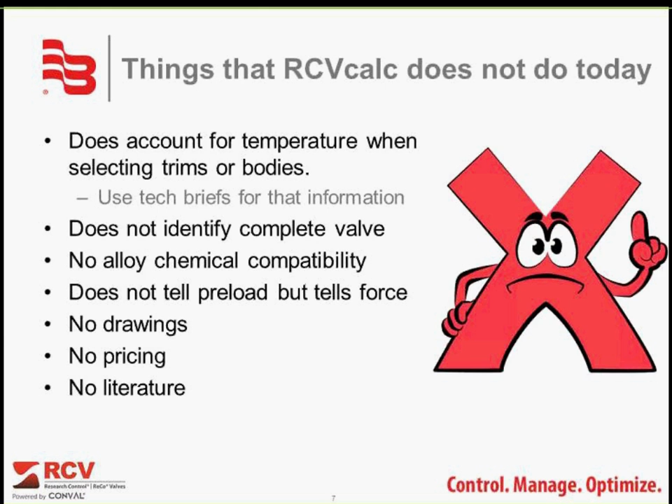The goal for RCVcalc when we created this was to give our customers a fine-tuned software program for low flow opportunities. This is that. It's a great product for that. It's available to all end users. So we've invested the proper resources to make sure that anyone who wants this program can get it at no additional charge. It's a very easy way to do business with us.

There are additions that will be coming in the near future, but this is our current offering, so please stay tuned. One of the neat things about this is that we will have upgrades for the software as well as the database to keep you automatically up to date for future opportunities. This product does gas, liquid, steam, and supercritical media. It has a fantastic database and graphical interfaces. There's a lot of things to really like about this.

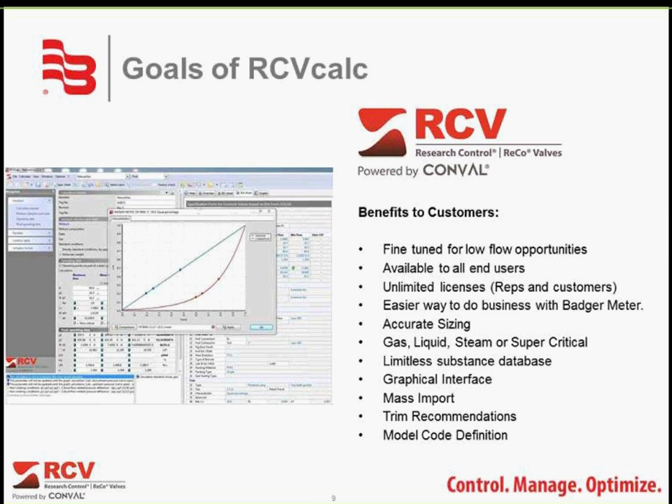One of the main features that we're proud of is that we have a mass import tool. So when you have an application that has a multitude of valves associated with it, we will give you an Excel sheet that you can upload that information to, and then we can download that back into RCVcalc. This will allow us to make short work of a very long project. And when there are changes on this project, you can alter the spreadsheet and get submittal data almost immediately. That's something that we're only going to do in-house right now. To get this, please contact customer service.

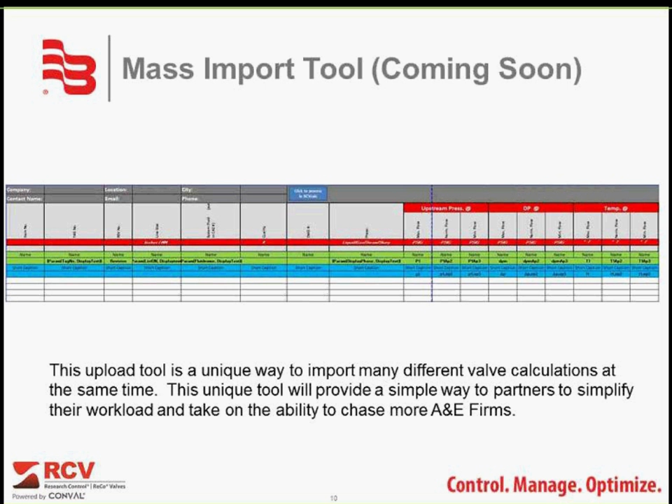Next thing I wanted to identify is that this tool also leverages NIST database identification. So what this does through the National Institute of Standards and Technology is that if you already have the NIST database on your PC, RCVcalc identifies that and uploads that within the database section of the software.

The benefit of this is that it actually goes through and leverages the fluid properties and mixtures based on the thermodynamic equations of those different properties. It gives you more accurate process calculations for high pressures and for low temperature applications.

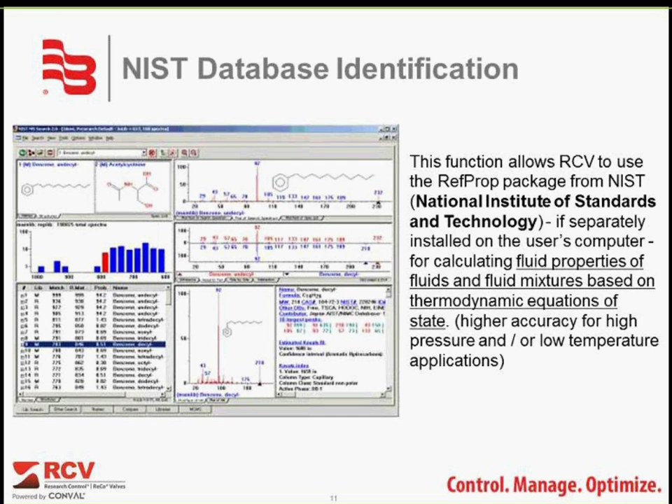What you're looking at here is the interface for RCVcalc. What we want to touch base on first is there's 4 main tabs that we use when navigating through ConVal or RCVcalc. The first tab is the medium tab. This is where we select our media and we put in the various application parameters. The second tab is the pipeline tab. This is where you can put in some specific information if your pipeline size deviates from the valve size.

The third tab is the control valve tab. This is where we get some information and can select the control valve, play around with swapping out some trim sets, and get some additional information. And then the final tab, which is called Actuator Forces, is where the calculations take place for the closing force on the actuator.

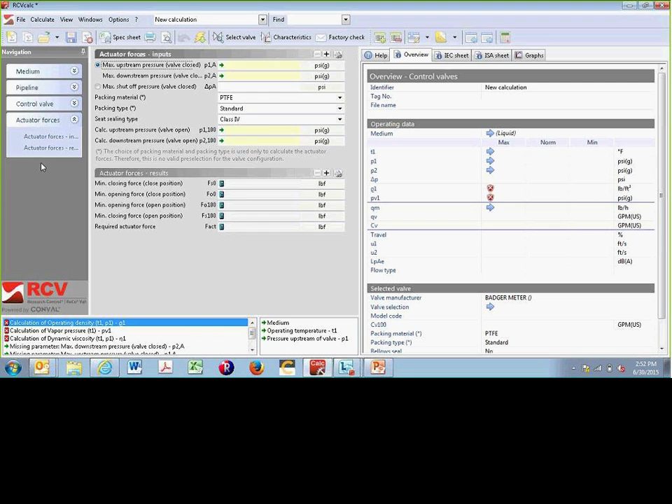Moving back to the medium tab, we're going to walk through starting up a new application for a potential customer. First thing you want to do is put in an identifier into the top field. Typically, your customer will provide you with a tag number to uniquely identify the valve. And then if you're doing multiple revisions, you can keep track of this with a rev number.

The next thing we need to do is select the media that the customer has specified is going to be in their application. We're going to keep it simple today, and we're going to choose water. Now, there's 2 ways to get to the media you're looking for. The first is if we begin to type, you can see that as I type WA, it searches the database and finishes the text for media that's in there. If I hit enter here, it'll choose water.

Now, the alternate way to get there is if we click on the 3 dots here to open the media selection menu. The first thing you're going to see is the favorites tab, and what you can see in here is some of the medias that I've used recently, and as you use the program, your favorites list will build up too. So some common stuff that you'll find on your front page is usually air and water and similar things. If we click onto the second tab, we get to the substances tab.

Because I was already on water, it's pre-selected here, but on the bottom box you can see we have a search text, and if I start to type water again, it filters as you go. You can see that it's got water listed, and then it gives you steam also.

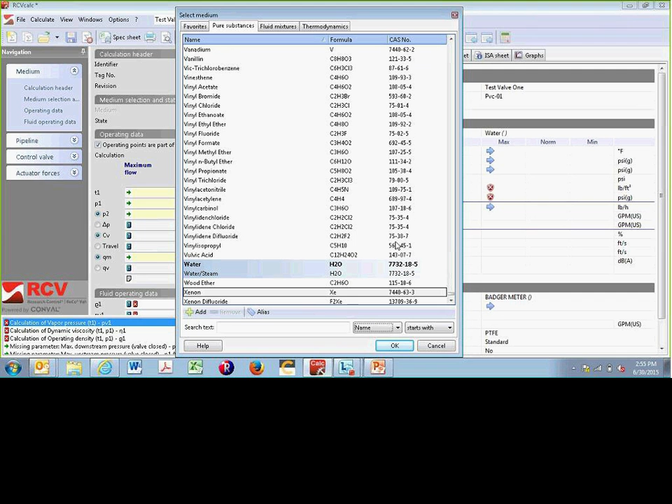Again, we'll go back through. I'll type in water. You can see it filters for water. We double click on this and it brings water into the medium section. You can see here in this line, this is going to identify the state. This is the ability of the software to determine whether it's solid, liquid, gas, or supercritical.

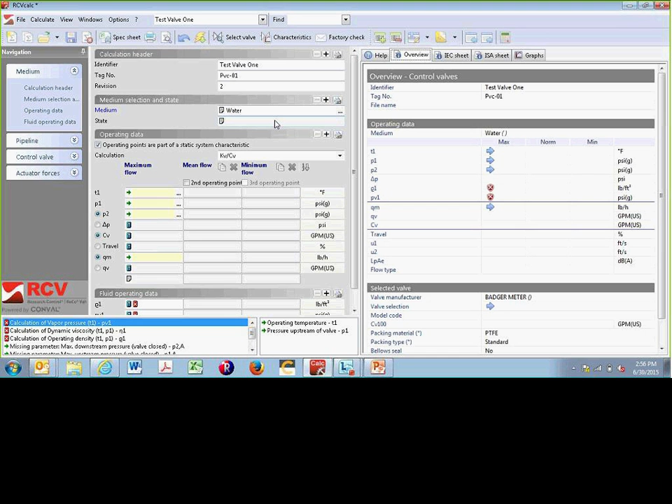Certainly we're not flowing solids, but if you put water in here below 32 degrees Fahrenheit, it will tell you that it's solid and prevent you from proceeding with the application. In order to do that, it needs to know temperature and pressure. What we have here is the operating data portion. This is where we have the data entry for the parameters typically supplied by your customer.

The important thing to note as we scroll down, some of these are a little cryptic. There is a mouse over function where if we hover over here, we can see that this first line that's shown as T1 is operating temperature. If we move down, P1 is pressure upstream of the valve, and so on down the line.

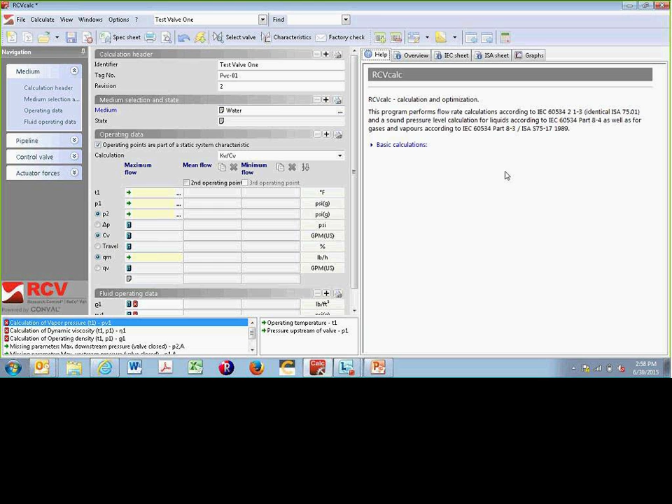Also over here on the right-hand side is a very beneficial help menu. Any of these boxes that you click on, you can see the help will tell you what the box is indicating. Any of these boxes that involve calculations, you can see the help file brings out the equation.

The equations involved. You can actually click on this ISA data sheet, which is a familiar output format, and you can see that as we type over here in the boxes, it'll begin to fill in the information over there, and we can bounce back and forth between the two.

So let's walk through. We'll do a hypothetical again. We're using water. We'll do 75 degrees, nothing outrageous there. 50 psi upstream, 25 psi downstream. What's important to note now is you can see that the state of the media has filled in, which means the software is telling us that at 75 degrees and 50 psi, we do have liquid water. Shouldn't be a surprise to anybody.

You can also see the information did begin to fill in over here. And anytime you see a piece of information over here and you want to figure out where it's coming from, if you click here, you can see that by clicking on the inlet temperature of 75 degrees, it brings the cursor function back over to that box.

Another important feature for the program is the ability to have drop-down menus here for the units of the application. So in here, a couple temperature variables, not a lot to see there, but under pressure, there's just a huge amount of possibilities, and that reflects the various amount of information you can get from your customer and the various units that they can use when supplying the information.

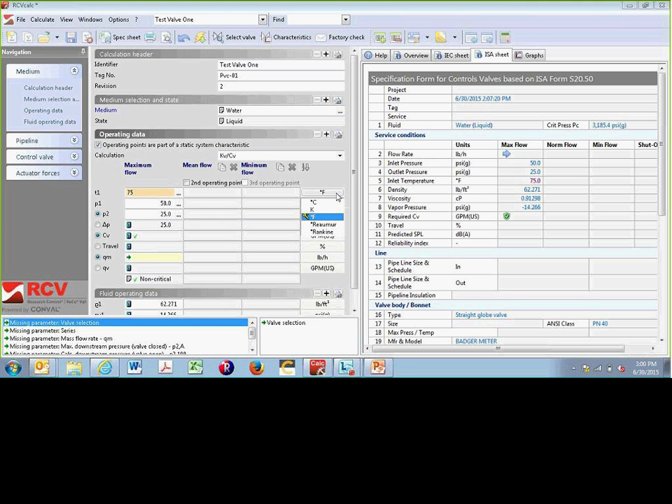It is important to note that if you change the parameter in the units box while you have a numerical value in this box, it will calculate the change for you. So we can see that if I change it to Celsius, it did change the temperature to Celsius. As you can see, it changed the units from Fahrenheit to Celsius. I'll just go through and change them back.

If you want to change the units on a global scale, if we come up to this arrow, we can do SI units or US units. If we click this, you can see it immediately went to the more familiar European units of Celsius, bar, and cubic meters per hour. And we can bring that right back to the US units typically used here of Fahrenheit, PSI, and GPM.

If we look over here, going down the left-hand side, we have the option of entering P1 and P2, or we can enter in the delta P. Saves you from doing a little bit of math if your customer supplies pressure drop versus P2. And you can see that if I put in the pressure drop of 40, it'll automatically come back and calculate the P2 of 10. We'll go back and change that to the original value, and you can see that when I put in 25, it calculates the other 25 for you.

We'll go through and we'll put in a flow rate. It's important to note that you have 2 lines here. QM, that's your flow rate by mass, and you can see over here that it has units of weight. And if we're on the QV, those are units of volume, and in this case it defaults to GPM. It will use the density of the media to calculate one from the other, but it's important to know that if you're looking for volumetric units, you need to click down to the volumetric area.

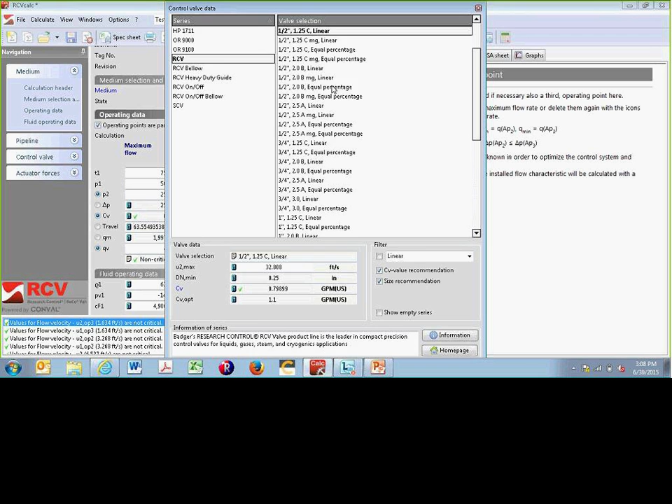We can see that this box is the travel percent of this trim at 4 GPM for these parameters. It's important to note that if you bring a trim in, you can see that we're at 63%, 31%, and 15%. If you want to try a different trim, there's 2 things you can do. You can click Select Valve again. We could bring in a B equal percentage trim to see what that looks like. We can see that we're at 80%, 65%, and 49%.

If you want to compare 2 trims on the same chart, we click on this characteristic button, and what it brings in by default is the trim you had initially selected. So this is the B equal percentage, and we can click this comparison button, and let's just see what an A equal percentage looks like. We'll double click that. Now you can see the blue points represent the A equal percentage. It's a larger CV. It brings the points down the flow curve as we would expect.

We can even try a larger trim. Not in the 1/2 inch valve, that maxes out at the A trim, but if the customer wanted to do a 1 inch valve, we could see what the 3.0 equal percentage would look like. Again, it brings the points farther down the curve. If you choose to convert the software over to the comparison trim, you can click Apply, and we can exit, and now you can see that we've moved over to that comparative trim.

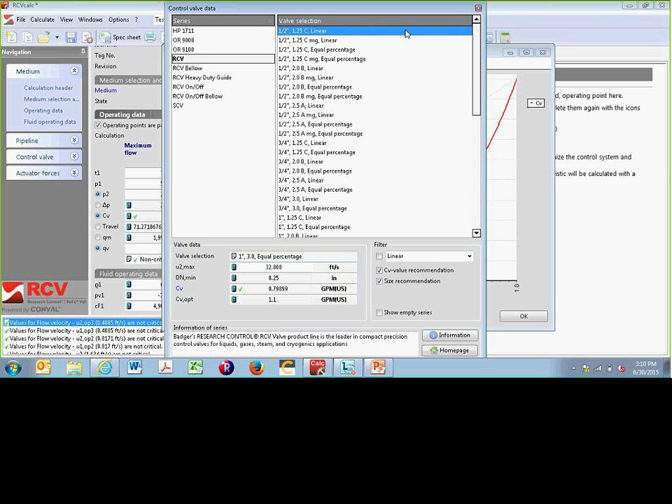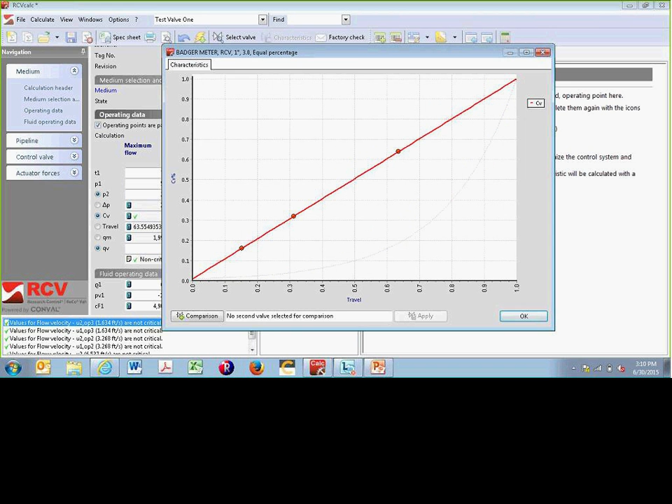Let's go back to our original C linear, because we can compare the linear versus equal percentage. We'll take a look at that. So you can play around with the values, bring trims in and out, get a feel for which ones get you equidistant from the top and bottom and is a good fit for your customer. So we basically fully define an application here. We've selected a valve, half-inch with C-trim. We're between 63 and 15% open. That's acceptable. We'll move over to the Pipeline tab.

Over on the Pipeline tab, the important thing to notice is that if your line size equals your pipeline size, which this box comes in checked by default, you really don't need to do anything here. The equations here are usually used for flow velocities. As your pipe diameter increases, your flow velocity out of the valve will decrease. If you deselect this, it allows you to edit these fields.

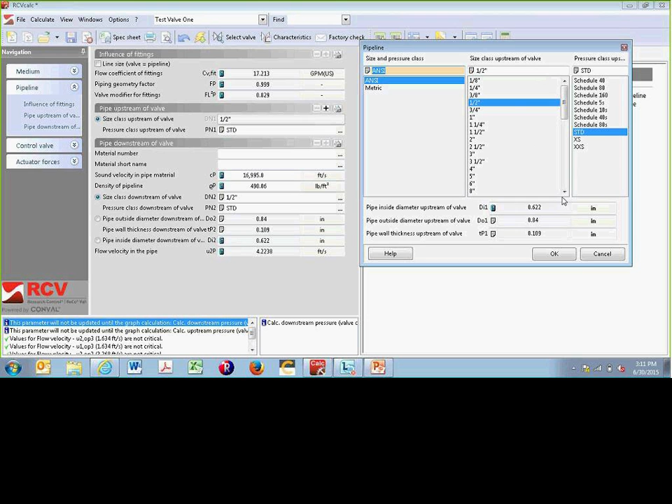So if your pipe upstream of the valve is something other than half-inch, just like on the valve selection area, you can click on here. You can modify your variables. But again, that's not too important unless your line size is different than your pipe size, or you're using some very heavy-walled pipe or something that deviates from what you would see as a standard.

If we move to the Control Valve tab, we can go through here. It tells us, based on what we selected, we're in the RCV family. There's that half-inch 1.25 C linear trim that we picked. And it does start the traditional RCV model code for you, 1802 for half-inch, and it does bring in that C linear trim. Because in the program here, we're not selecting a body type, we're not selecting materials, we're not selecting trim materials, and those would be what these other X's are for. We can't make those decisions to fill out the model code at this time.

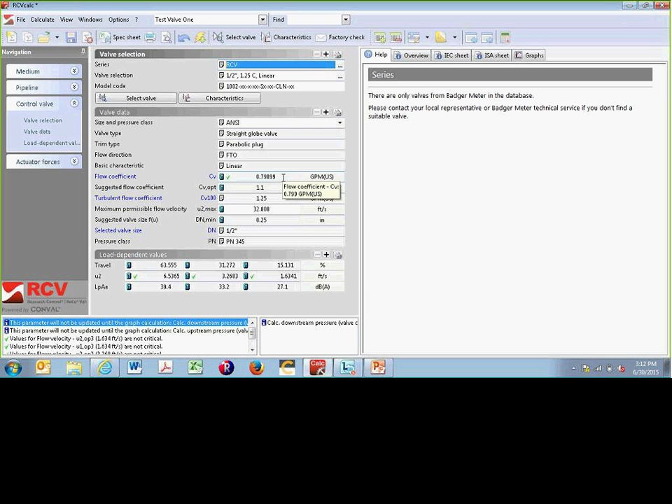We can walk down. It's a straight globe valve that was selected, parabolic plug, flow to open. These things are all standard for the Badger valve family. The basic characteristic is linear. We selected that when we grabbed the trim. This is the calculated flow coefficient. The CV100 is our selected CV. Again, that goes back to the C trim that we picked. And it does give you a suggested flow coefficient of 1.1, and we actually picked the next largest trim up from there.

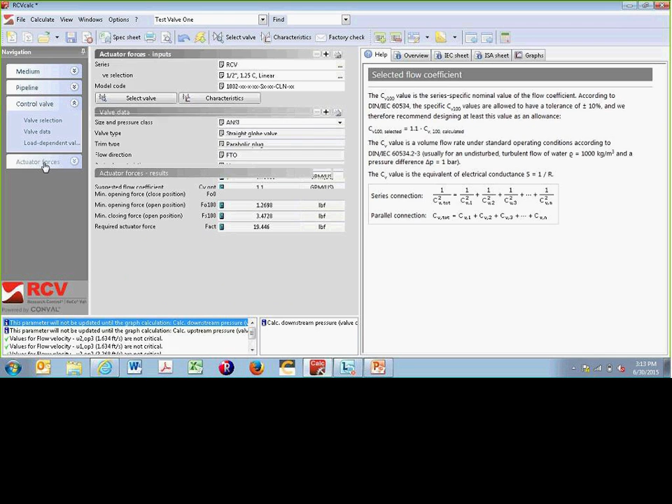Down at the bottom again, there's a summary of the travel for the valve. Again, if you mouse over on the left-hand side, it gives you more info. This is the flow velocity exiting the valve, and this is the predicted sound level in decibels. If we bounce over to the Actuator Forces tab, it did carry over the maximum upstream pressure from the medium tab of 50 psi. It actually brought in the second downstream pressure.

And what it's walking through down here is some various force calculations. What's important is the bottom one, required actuator force. This is not preload. Brian touched on that during the PowerPoint. This is actual linear pound force. And what you need to do is divide that by the surface area of the diaphragm to get the PSI. So with our half-inch valve with 11.3 square-inch diaphragm, you're looking at just under 2 pounds of preload, which is certainly important to note for shut-off purposes for your customer.

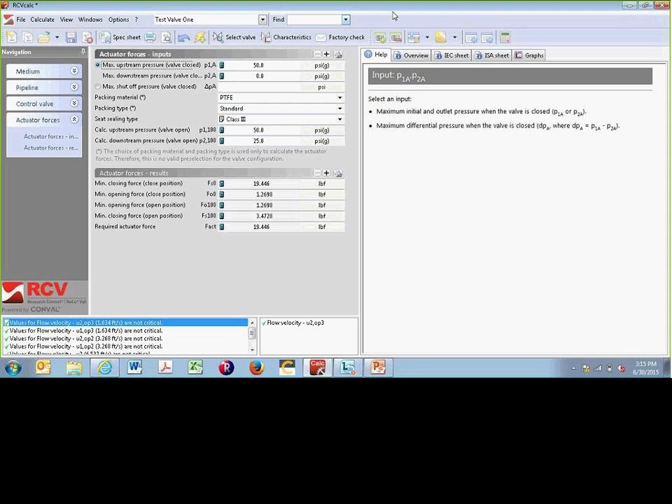Now that we've basically configured a whole valve, ran through a whole application, selected a trim, let's see what we can do for outputs. We talked about this briefly before. Over here on the right-hand side, there's this overview document.

There's the IEC, which is the European format document. Then we have the ISA data sheet. Again, if you need to see where any of this information is coming from, if we touch on this density here, you can see that that density information is coming from that box. If we touch on vapor pressure, you can see that that information is coming from that box.

It's also important to note each one of these menus has a plus sign. That plus sign is an expansion button for the information that's contained here. What you see by default is the more common, readily used information. Behind the scenes, if we click on this, you can see there is more information. Certainly down here at the fluid operating

data, if we click on that, you can see that there is information on calculated viscosity, vapor pressure, vapor temperature, sound velocity, which again has to do with noise levels. It actually calculates input, the density of the media into the valve and density out of the valve. That's a more important factor for gas phase media. You can see it does change slightly here, but for liquids that's usually inconsequential.

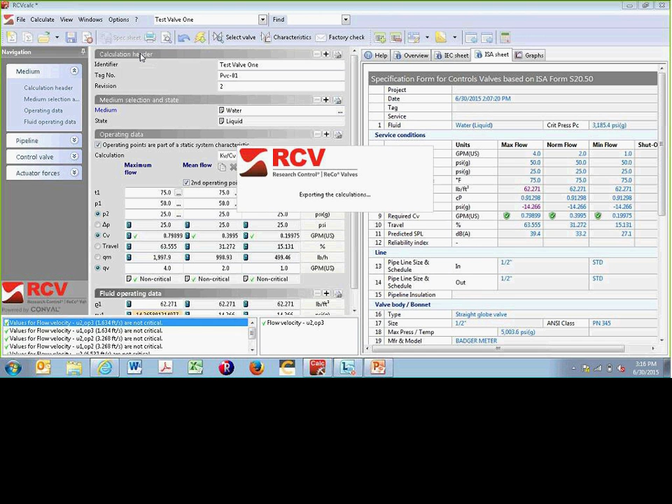But if we look at our available outputs for the application, if we go over here again to the top menu button and click on the spec sheet, what it's going to do is it's going to take a second, it's going to generate 2 Excel files. Now the first Excel file is an ISA data sheet that is filled out with all the information that's been supplied to the program up to this point.

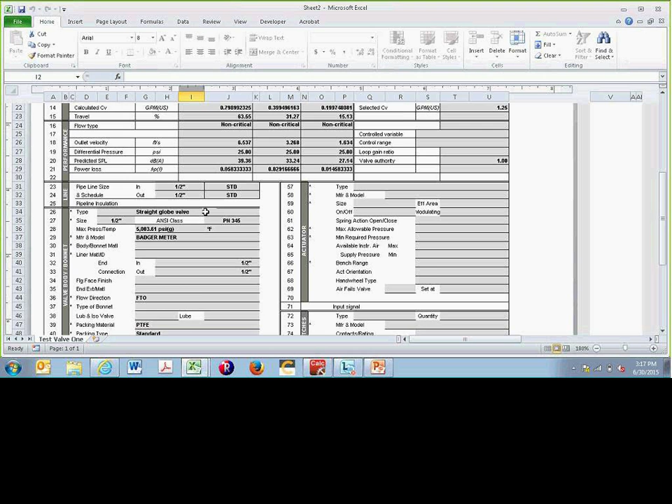Performance data is at the top, followed by the lower portion of the sheet, which is typically used to define the rest of the valve. It did bring in the straight globe valve. It brought in your line size, the flow to open, the packing material. It's a parabolic plug with a linear profile. You can use this sheet then to continue on and define a positioner for the customer, define the actuator information, any switches, air sets, tests, or special considerations you need to do.

If we move over to the other output sheet, if you've gotten anything from us that's been sized internally, you may be familiar with this format. It did come through, and it brings the information who created the file. This is our header information that we put in to name the valve. It did carry that rev number over, and then the valve tag information came with too.

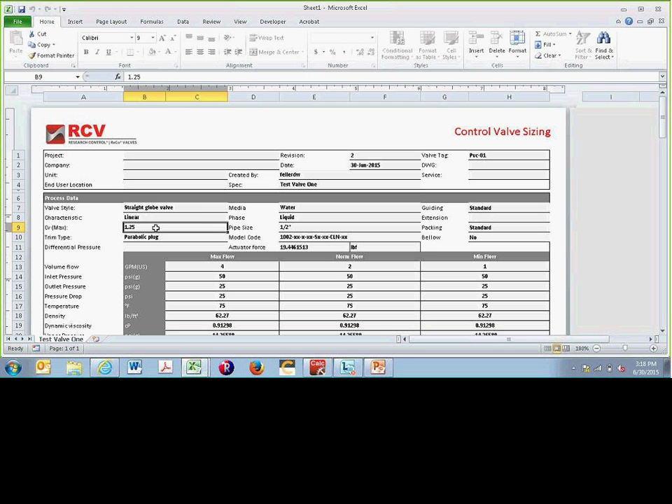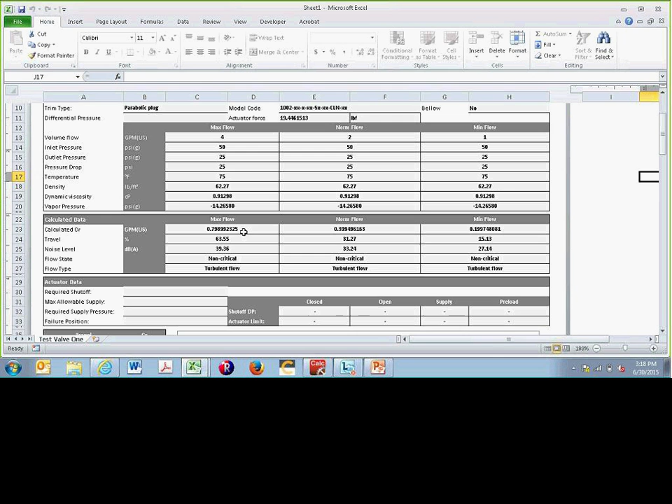Again, a brief summary of the valve we selected: straight globe valve, linear. There's that Cv 1.25 trim set again. And then there's a nice little summary chart of, again, the process data. Here's your travel information and your calculated CVs. And if we scroll down, then we have this output graph that you can supply to your customer.

There is one other output that you may run into that we'd like to show you. Just like anybody else would, you typically click on File and Print. You're going to get this prompt box. Let's just run through it. We won't make any alterations. I'll just hit OK. And I'll do it to PDF so we can see what the output looks like.

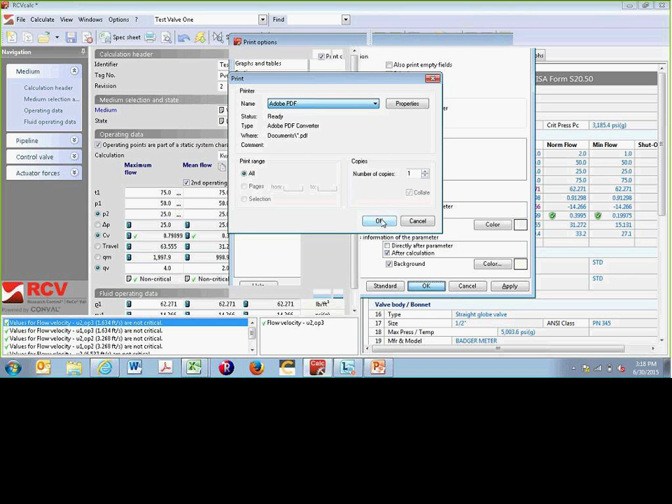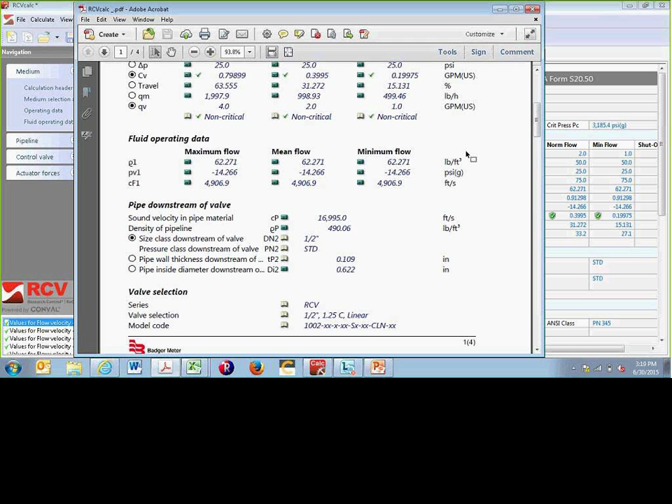And what you get out of here is, again, it brought in the header name. We've gotten feedback from outside personnel that this is not the most intuitive format. It really is more of a raw data dump. It's everything under the sun. We did go through and have the ISA data sheet and the standard valve output created to make it a little more intuitive for your customer.

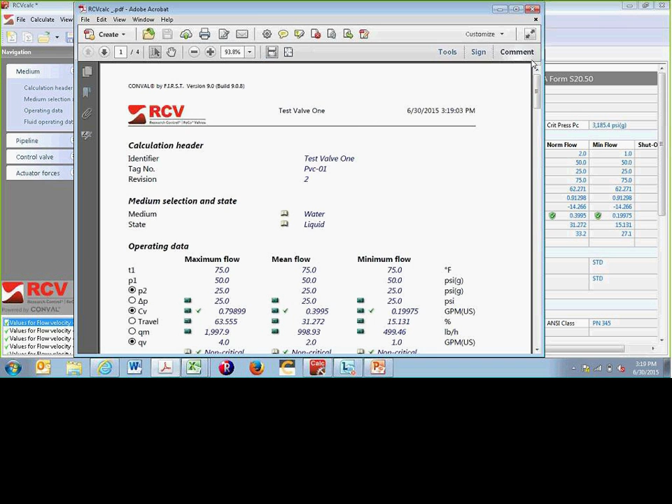But my guess is anybody familiar with Windows-based programming is going to click File, they're going to click Print, and if you end up here, that's why. We highly recommend, rather than File, Print, you do click on the spec sheet.

All right, one other thing we did want to show you here, we still got our water application up on a 25 PSI drop. What's important to note here is you can see that the calculation is non-critical. If we go through and I increase this P1 up to about 200 PSI, you can see that the non-critical suddenly becomes incipient cavitation.

What that means is we're right on the cusp, we're on that borderline of cavitation where the bubbles begin to form. If we continue to increase P1, you can see that it crosses over into severe cavitation. And this is where, when the cavitation warnings pop up, you want to start thinking about the harder trim materials and taking some preventative measures on that part.

The other thing we can do is if we continue to bump up the temperature, you can see because the vapor pressure has come up with the increase in temperature, now we have choking cavitation. And what that means is the bubble formation is so vigorous that it actually starts to inhibit the flow through the valve. Again, it's not to say that the valve can't do this flow. We can still see that with the C-trim, the valve would be 20% open. It's just giving you that warning to let you know that your flow through the valve is becoming more and more damaging.

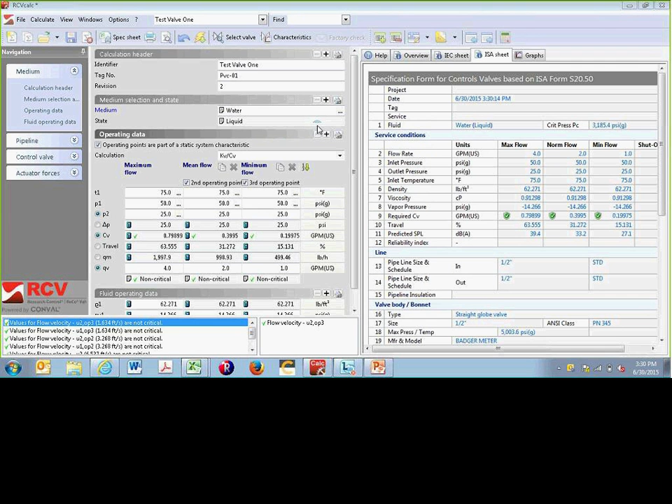And speaking of communicating with the factory, if I close out of here, what's very important to note is this factory check button. If you click factory check, it's going to ask you if you'd like to attach the current calculation to a support email. If you say yes, it will go into your local email tool. And what it's going to do is it's going to generate an email. And what you can see here is it actually created a CCV file, which is the ConVal extension. It's attaching that to an email.

And in this box up here, because I'm at the factory, I have the ConVal support email in here. But what's going to come up when you click on this is the designated support representative that was programmed into your ConVal license. So if you're an end user, the support email is going to be generated to your local sales representative. If you happen to be one of Badger's sales representatives, the email is going to default to the factory, and then that can be passed on to us to take a second look at.

If you're going to do a second application, you can have multiple ones open at the same time. Certainly, if we go over here, navigate over to a new application, it'll bring up a fresh window. We're going to run through one simple blended gas application because that's probably the first blended application that you're going to run into. We're going to name it, we'll name it test gas, blended gas, Rev 1.

So we're going to go through, and I'm going to click on my button over here to bring up my media database, and I'm going to click on fluid mixtures. We touched on this tab a little bit. And what I'm going to do is click on gas mixture. And if I go to substance composition, I can click on this again, and it's going to bring up some gases that come stock and some gases that have been created before. But what's important here is to click on this new button, and we're going to name our gas. It's good to put an intuitive name to it, so we'll call it 50 oxygen, 50 nitrogen.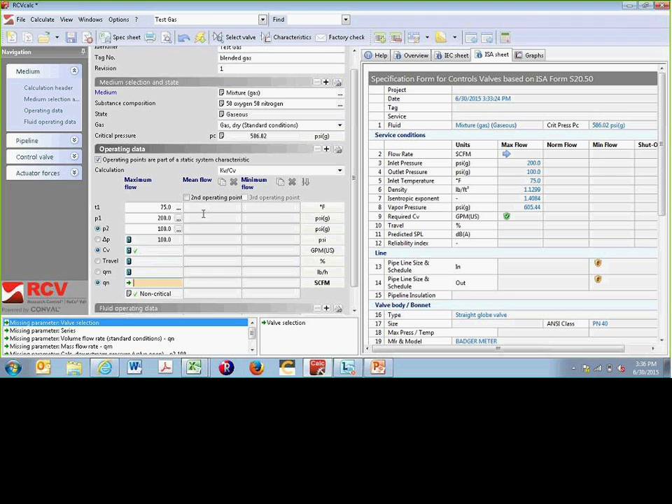We type in 10. It does again use the density to calculate a mass flow rate. We could put in a mass flow rate if that's required, if your customer is using a mass flow sensor and measuring their stuff that way. Again, we have the expanded menu down here. We can look at some of the parameters. Again, the mouse rollover is helpful here.

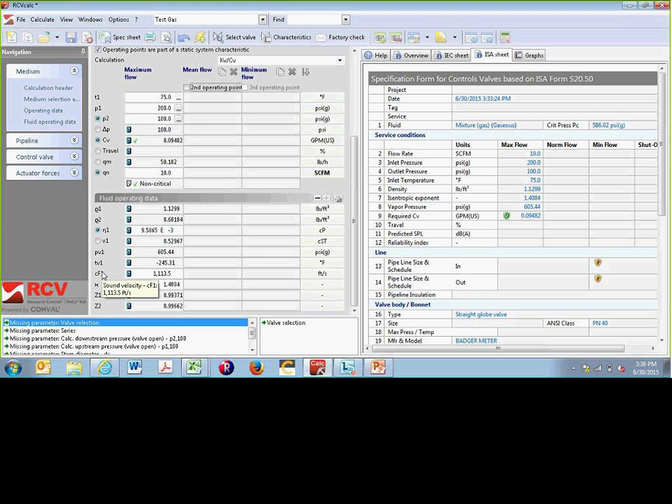So this is the real gas factor. This is how much the gas deviates away from 1, which is an ideal gas. You got your heat capacity ratio, and again, your sound velocity, vapor temperature, vapor pressure, and density. And once again, we can go through and grab some other operating points. 8 standard cubic feet per minute, 5 standard cubic feet per minute. Our CV is about 0.09.

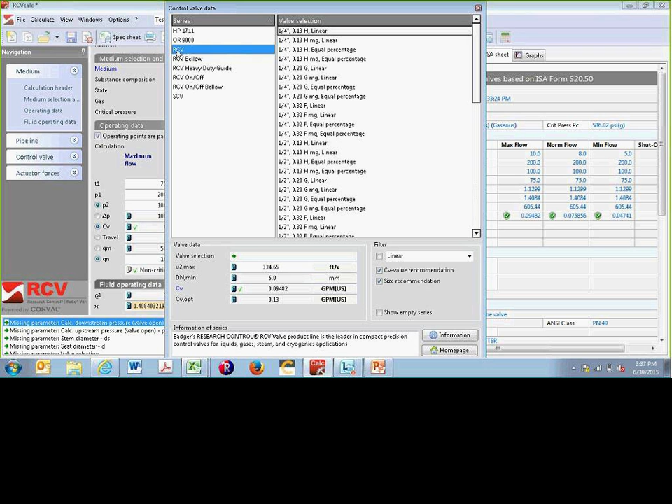We'll go up and we'll grab a valve. And it puts us on the quarter-inch 0.13 linear. We want to make sure we're in the RCV family. It will default to the top of the list. If you want the RCV, you do have to click there. We'll bring in that 1/4 inch H trim. You can see that we're 71% open, 56% open, and 34% open, which would be perfectly acceptable in these applications.

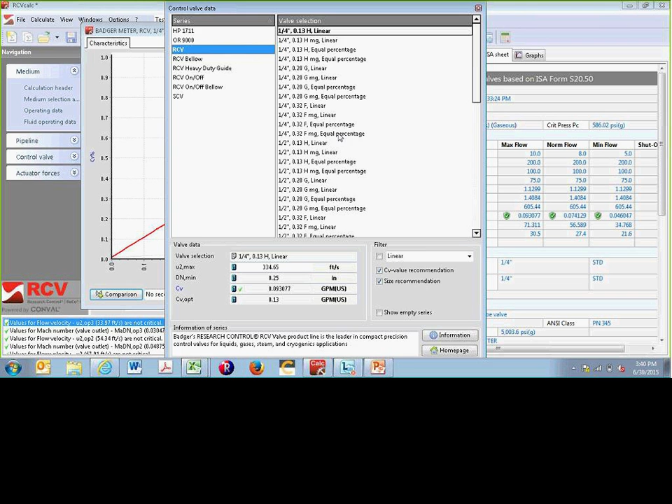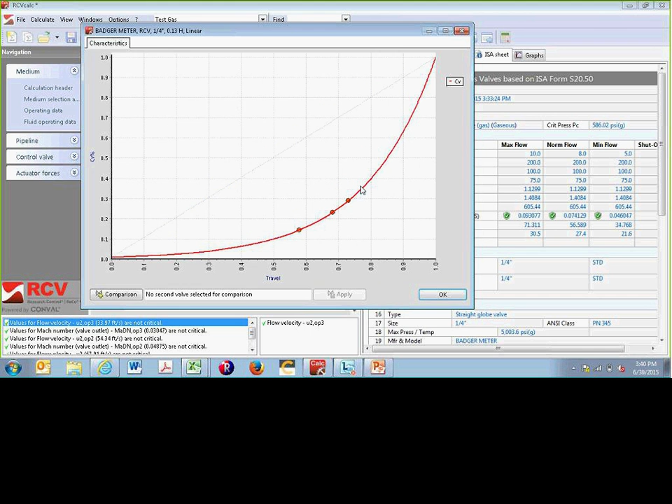The flow is non-critical. All right, so what you can see here is we do have that H trim pulled in. Again, if we wanted to modify that trim to be a different characteristic, we can click on this button, click on comparison, RCV. We could bump it up to see what the F equal percentage would look like. Double click that. It will bring in that equal percentage curve. And if you wanted to transfer over to that trim, you would click Apply and click OK. And then you can see here we've carried that other trim over.

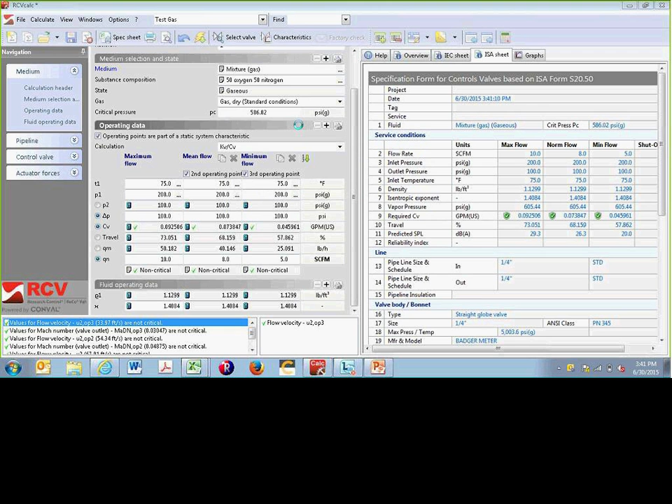And once again, if you have any trouble getting results you're happy with, or you have any questions, the best thing you can do before you call, and we'd be happy to take your call, but if you hit factory check, it will come over and generate a file that contains all the data for the process you're working on. And if you can shoot that over to us, we can open it up and we can see exactly what you're seeing without you having to re-describe your entire application to us over the phone. So certainly use that, take advantage of it, and we'll be happy to get you up and running.

All right, some additional topics as we close out here that we wanted to touch base on. Certainly we showed you the media database. As we said before, there's over 2,000 predefined media in there. You can mix them, match them, blend them, play around.

What you're going to find, though, is you will find an application where the customer says, this is my proprietary mixture, and I can't really tell you what it is, but its density is 1.1 grams per cubic centimeter, and the viscosity is 5 centipoise, and the vapor pressure is minus 14 psi. And we have the ability to support that.

We can go through and enter that data manually, and as long as you have the appropriate parameters to define the media, you certainly don't need to pick one from the database, and you can work directly off the parameters from your customer.

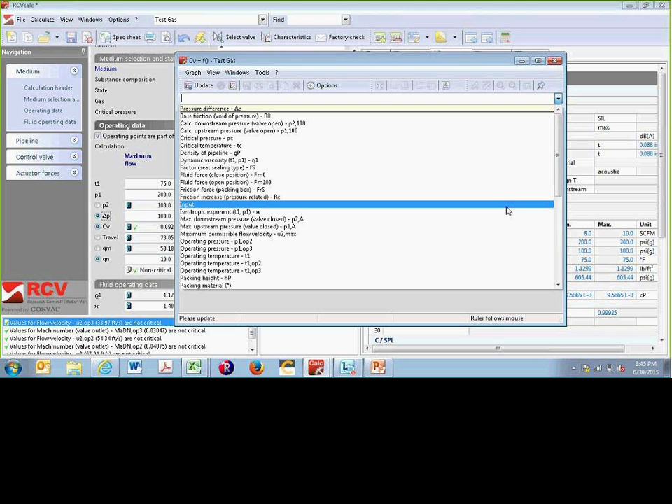There are some customized graphics tools in here we'd like to show you. Any of these places where there's a calculator, you can define a graph that involves this parameter, so in this case CV, and you can graph that against a different parameter. So if I come through here and I want to graph the CV versus pressure difference, so that's valuable. What does my CV do as my delta P changes?

Because I clicked on the calculator for CV, that's my one variable, and I want to compare it to pressure difference, and I click update. It'll take a minute. It's running some calcs behind the scene, but it'll come back with a nice graphical representation of what the CV does as delta P increases.

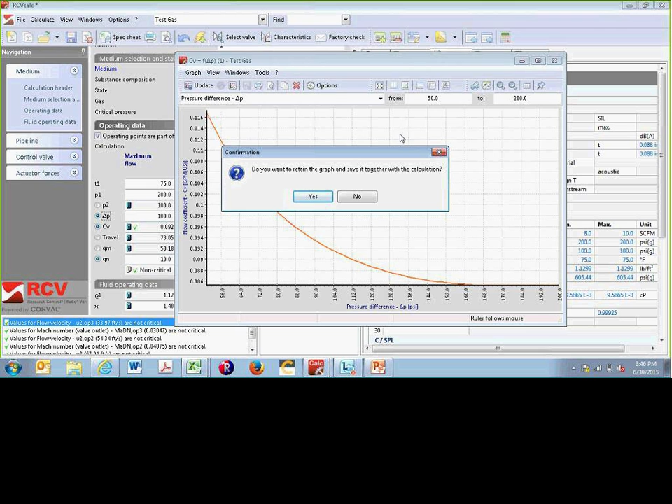If I X out of here, it's going to ask me if I want to save it. If I say yes, over here on the right-hand side is a new tab that has some graphs in it, which we can retrieve again. We actually have to update it again. But if you find a graphical parameter that you like or that you think your customer would find valuable, you can save it and bring it up again.

The other thing we'd like to touch on briefly, we're not going to do any calculations on this today. What we did today was we solved for CV, or the flow coefficient required for the valve to meet the flow requirements of the process. If we use this drop-down, there are some other variables we can solve for. So there's 4 variables in here. You can solve for any missing one if you have the other 3.

If you have the CV of the valve and P1 and P2, you can solve for the mass flow. If you have P1, the flow rate, and the CV of the valve, you can then calculate the pressure drop that's required. You can also manipulate, we'll show you a quick one here. So we'll solve for flow again. And we can change our travel, we can go through and say, hey, what's the max flow at 100% travel?

And if you watch, we are at 10 SCFM here. And if I change that to 100% open, we're now at 33.9. So based on these parameters, we can see that the maximum flow through this valve at this pressure drop and this temperature would be just shy of 34 SCFM.

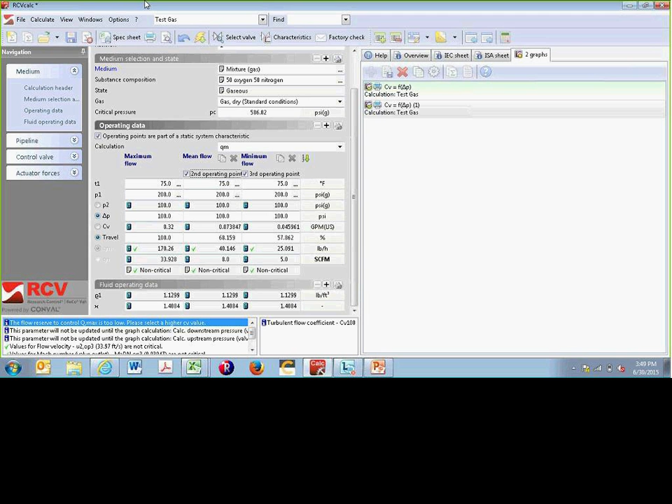All right, thank you everybody for being with us today. Before I hand it over to Brian, I would like to just reiterate the factory check button and the value that has. If you get stuck or you have any questions, use the factory check button. It's a great way to get in touch with us. It includes all the information we need to help you out.

There's a lot of stuff here. This is certainly new to you. We've been using the program internally for a couple of years now, and some of our counterparts at our division in Europe have been using it for over 10 years. So we've got quite a bit of experience. We've got a direct line to ConVal if we get stuck, and we're certainly here to help. I'm going to turn it over to Brian and let him close it out.

I'd just like to say thank you. This is a long time in coming. We're very excited about this new software. We believe it's going to help our customers and our reps sell more product for us, and we believe it's a very, very valuable tool to help you solve your problems in real-life applications.